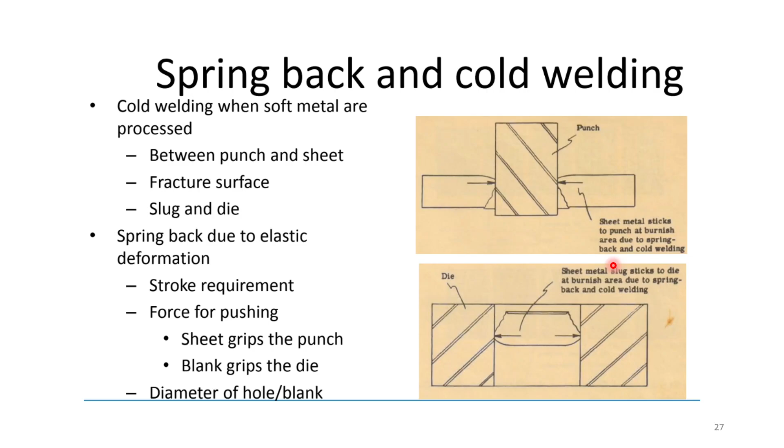So for getting rid of that, there are some methods used such as stripping. Here fixed strippers are used, so the stock is not directly put on the flat surface, rather you use a fixed stripper. So when this punch is traveling and coming back, it won't be sticking to the punch. This is separation of sheet and slug from the punch.

Now for the cutting force, for the optimum clearance you require this snapback of punch due to sudden release of the force as fracturing occurs. If there is no secondary shear, then it will be a vertical edge. In case of low clearance, where die and punch are very close, there will be a secondary type of shear, so extra stress will be required, possibly at a particular angle, but this secondary shear is not measurable.

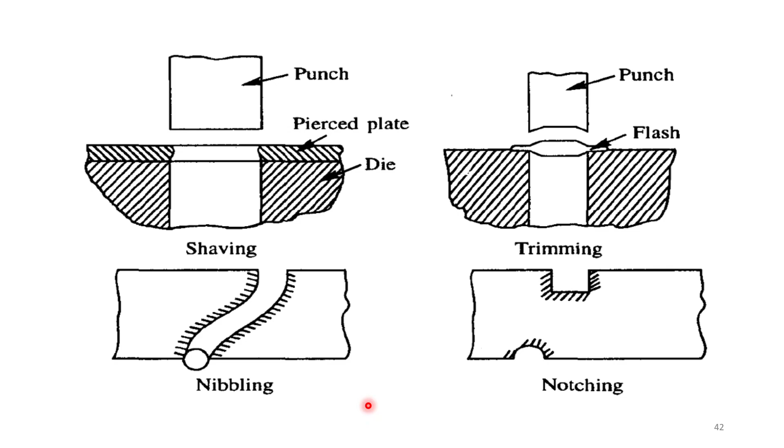Lecture 33: metal working processes for sheet metal operations. In this case, these operations will be involving tension.

Next, sheet metal operations involving compression. First is ironing, which involves thinning and lengthening of the wall of the material by generating compressive stress between the die and punch, using a clearance finer than the drawing operation. Up to 50% thinning can be obtained in a single ironing operation. The initial thickness of the part is reduced, and because of this reduction in thickness, the length will also increase.

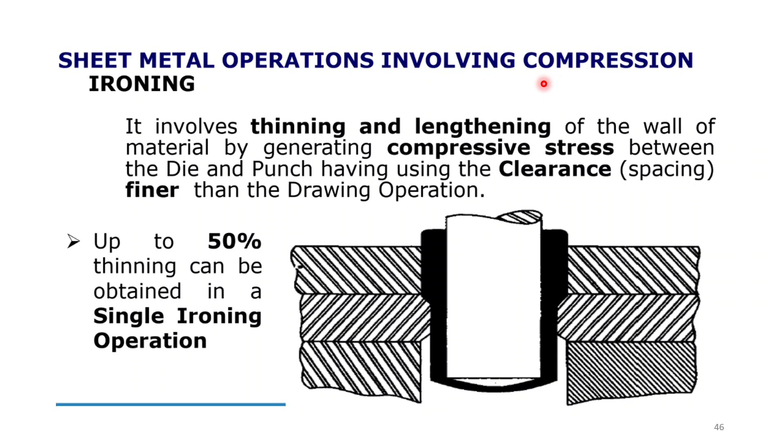Next are sheet metal operations which consist of both tension and compression, starting with drawing and deep drawing. Drawing is the process of making cups having height less than half the diameter, and similar products from metal blanks. When the cup height is more than half of the diameter, the process is known as deep drawing. Here you have the punch traveling, and here the blank, which will take the shape of the shell given.

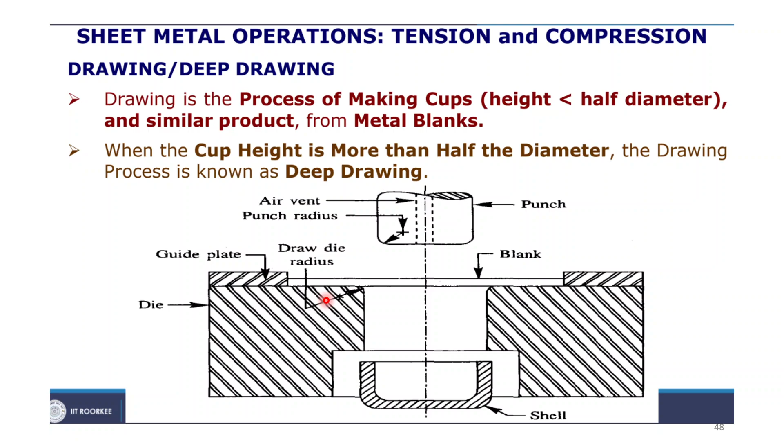So this is the process of blank holding in deep drawing. Here you have a rigid blank holder. After this, the punch will travel in this direction and take the shape of this particular die. Here you have blank holder, draw die, and the metal in this area will straighten upon further penetration, so this part will keep coming in this direction.

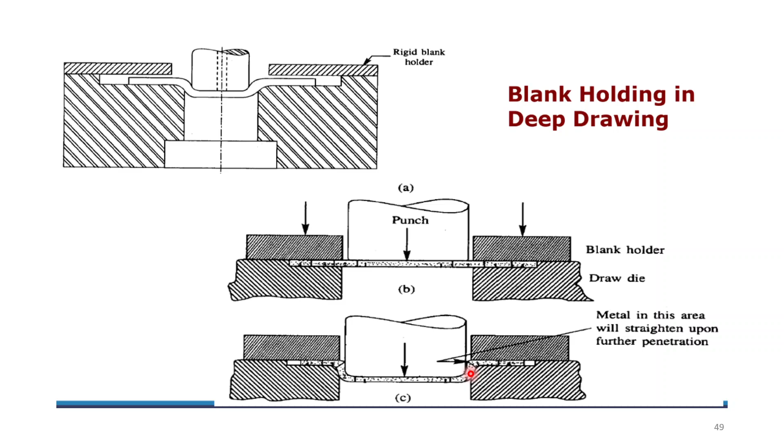Now these are various drawing defects. First is wrinkling in the flange, due to small holding force. When you have small holding force, you'll face this type of defect, wrinkling in the walls, due to insufficient holding force, initially occurring on the flange.

Tearing occurs due to high stress and sharp die radius, along the edges. Earing occurs at the edges, due to anisotropy of the material.

Surface scratches occur due to improper surface finish of the die and punch. The die or punch will not be having a smooth surface, and there is insufficient lubrication.

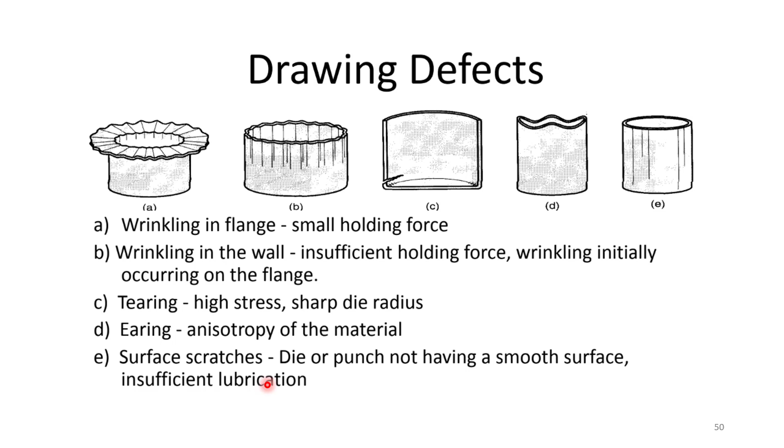Next you have spinning. It is used for making axisymmetrical cup-shaped articles. The force is applied on the rotating blank, and it is held against a form block so as to get the shape of the form block, which can be of wood or other materials as well.

Next we have bending operation, an operation of deforming a flat sheet around a straight axis at a neutral plane. When the material is subjected to plastic deformation, the neutral axis moves downward due to differential strain on both sides of the neutral axis, as the material opposes compression in a much better way than tension.

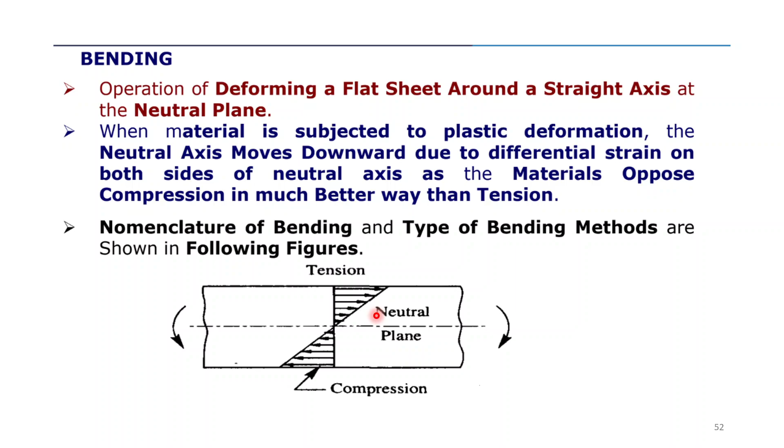Nomenclature of bending and types of bending methods are shown in the following figures. Here you have the neutral plane; above this you will face tension, and below this your material faces compression.

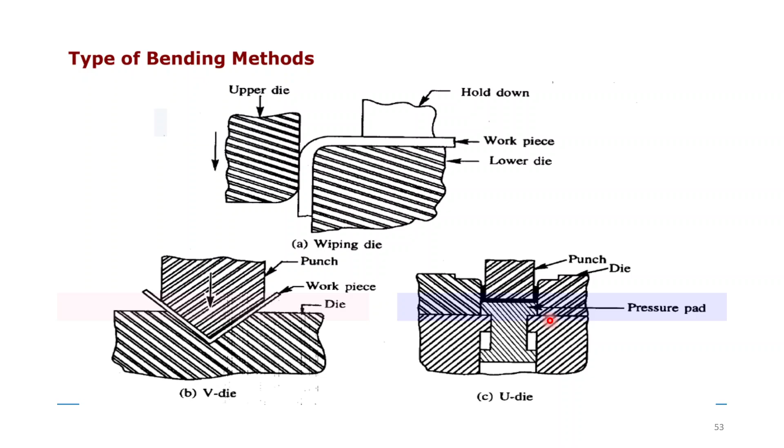Other bending operations are straight flanging, stretch flanging, shrink flanging, hemming, seaming and curling.

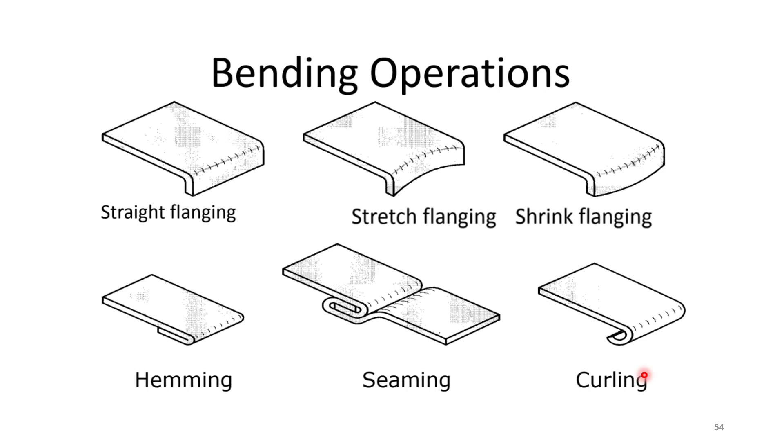Embossing is an operation of making raised figures and letters on sheets with a corresponding relief on the other side. The process involves drawing and bending of the material, and is generally used for increasing rigidity by localized deformation and for decorative sheet work. Between the punch and die, particular designs, figures or names can be engraved onto the metal sheet.

In lecture 34 we'll be talking about dies and die sets.

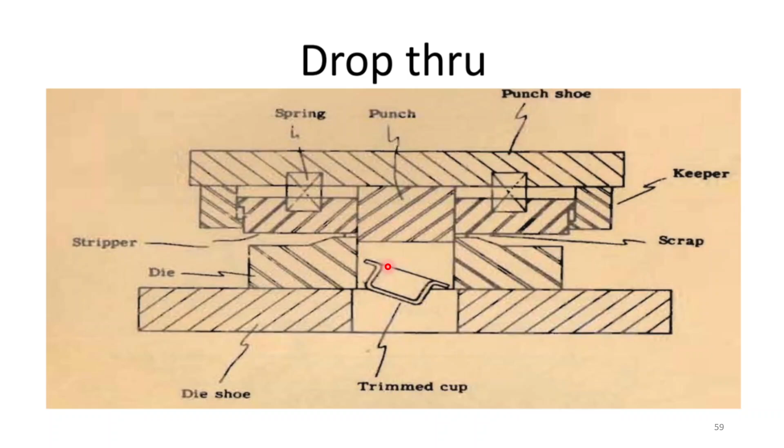Many processes are done using dies. First is cut off, where you have die and punch for cutting off the sheet, or drop through, where you have trimmed cups. Various types of dies can be there. Then you have return type die, where you have a spring on the die, which is used for the return of the blank that is formed.

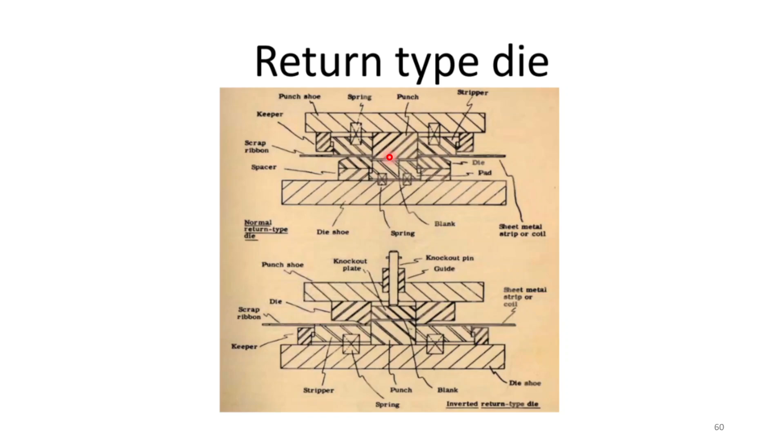Then you have compound type of die. What is the difference between compound and combination? In case of compound, you will be having similar types of operations combined in one stroke and one stage, while in case of combination you will be having different types of operations combined, such as cutting and forming.

In case of compound die, it is employed when multiple cutting operations are conducted in a single stroke at one stage, and this die type offers certain advantages and limitations. The advantage is high production rate, since one component is produced per stroke. The limitation is higher force requirement compared to other die types, and complex design and manufacturing for more than 3 operations.

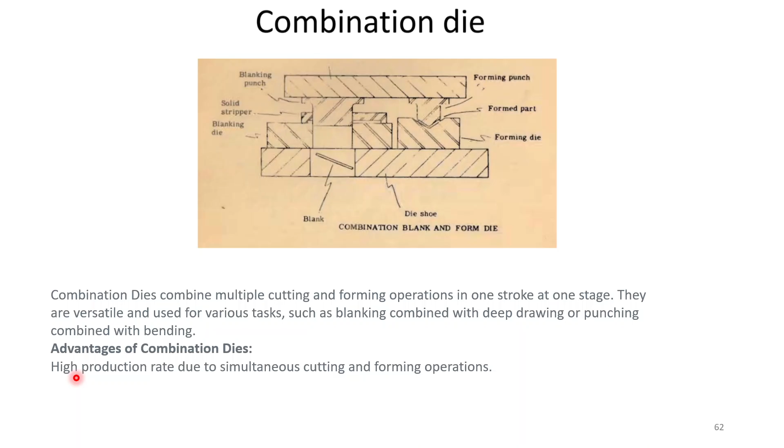In case of combination die, it combines multiple cutting and forming operations in one stroke at one stage. These are versatile and used for various tasks such as blanking combined with deep drawing, or punching combined with bending. The advantage is high production rate due to simultaneous cutting and forming operations.

In case of progressive die, we have progressive dies which are designed for multiple cutting operations in a single stroke but at different stages. The punched out sheet progresses from one stage to another until all the punching operations are completed, with blanking as the final step.

The advantage of progressive dies is comparable high production rate as in compound dies, and reduced force requirements which are achieved through shear or staggered punches. It has easier design and manufacturing due to operations being performed at different stages.

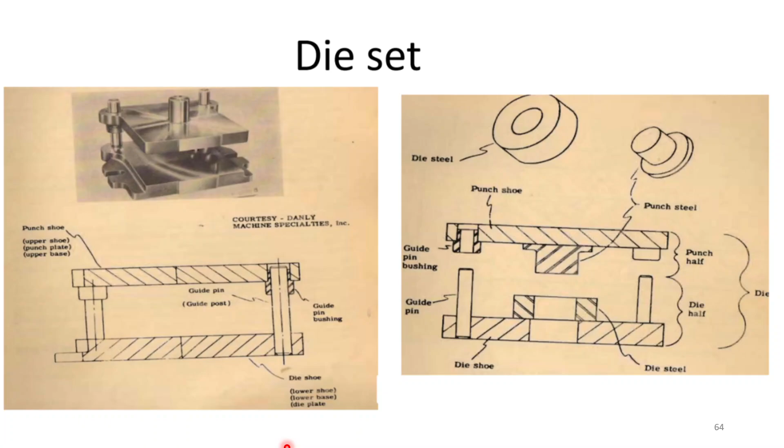And these are designs of other different dies.

Next chapter is material removal processes. Up to this part we have read about sheet metal forming. Now we go to the material removal processes, which is basically machining. So what is machining, by definition? Machining is a subtractive process used to get desired shape, size and finish by removing surplus material in the form of chips by a cutting tool, by providing suitable relative motion between the workpiece and cutting tool.

You can remember this definition by remembering lathe machine operation, where you have a particular tool which will be moving relative to the workpiece. The cutting tool removes excess material through direct mechanical contact, and the machine tool provides the necessary relative motion between workpiece and tool.

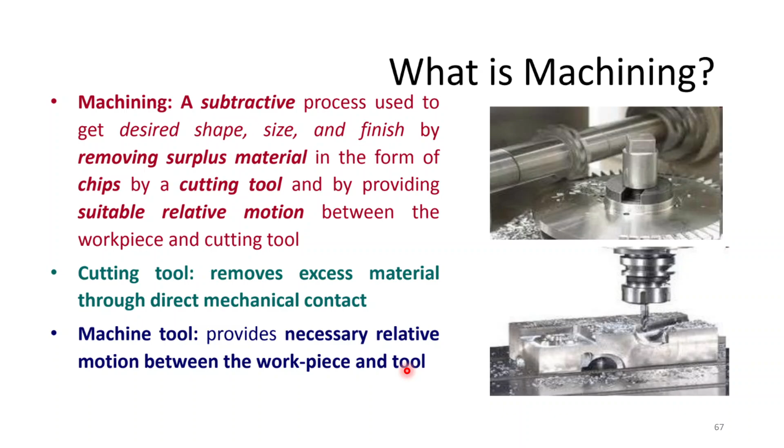So this is how your cutting tool is moving, and how the entire machine relative to the workpiece is moving. These can be at particular angles, they don't need to be parallel. This is the relative motion needed for various types of surface generation.

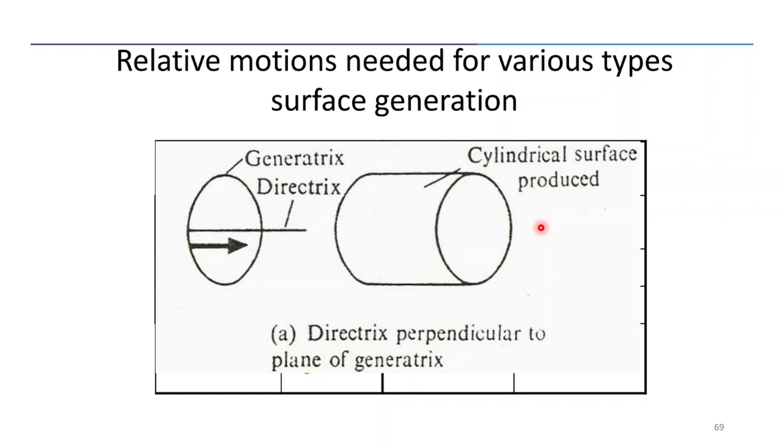So the directrix can be perpendicular to the plane of the generatrix, or it can be at an angle as well. So these are the types of machining processes based on the angle between the cutting edge and cutting velocity.

By cutting velocity, I mean the rotation or movement of the tool. If you're reducing the diameter of a rod in the lathe, the cutting velocity is not the inward movement to the diameter of the tool, but rather the rotation, calculated as pi*d*n by 60. The cutting edge is how the tool is moving, in a rotational part, in a particular direction, while the cutting velocity is the velocity moving perpendicular to the material.

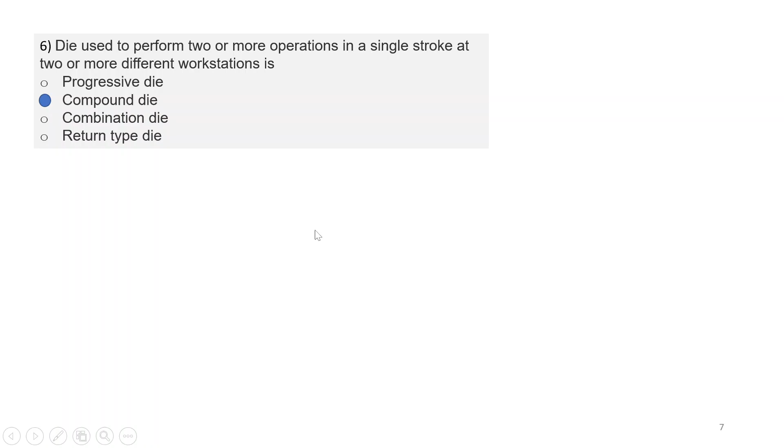The percentage can also be asked. For hard metals it will be 6 to 10%, and for soft materials it will be 10 to 18%. And which metals fall into soft metals, you can also remember - one of the slides had all soft metals listed. So lead, tin, aluminum fall into soft metals, and steel, silicon steel, titanium and others fall into hard metals.

So your clearance depends on the softness of metal and thickness of the metal. With increase in thickness there will be increase in deformation zone. Also, harder the metal, lower is the burnishing and deformation size, so there will be less depth of penetration in case of harder metals. The burr height will also depend on the softness of metal. If there is insufficient clearance, it can cause metal to compress or bulge out away from the punch, causing increased friction, and greater force will be needed to create the hole. With reduced clearance, it can increase tool chipping risk at some point.

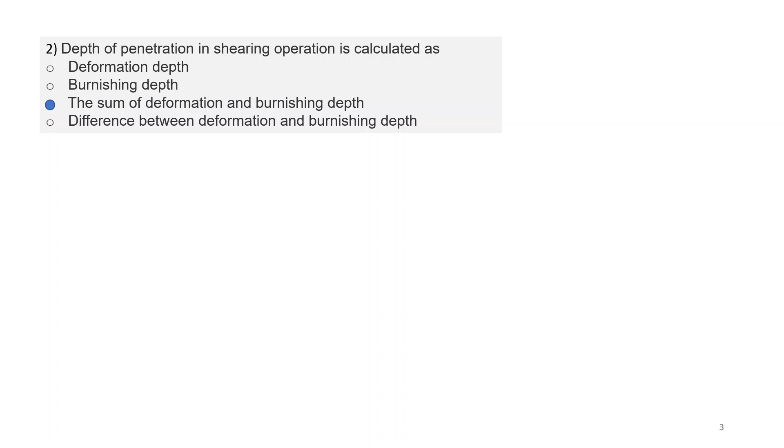Next question is: depth of penetration in a shearing operation is calculated as - your options are deformation depth, burnishing depth, sum of deformation and burnishing depth, or difference between deformation and burnishing depth. The answer is sum of deformation and burnishing depth. You can remember this diagram: initially your material is subjected to plastic deformation, then there's a burnishing zone, then a fracture zone, then burr height.

So the initial part - burnish and plastic deformation combined - is called penetration depth. In shearing, the depth of penetration is the depth of stroke when the cutting force is applied to the metal before it breaks or fractures, usually expressed as a percentage of the thickness of the work metal. The depth of penetration is roughly the sum of the burnish depth and rollover depth on the blank. Shearing is also known as die cutting - it is a cold mechanical cutting process which uses two sharp blades to cut sheet metal, where the lower blade is stationary while the upper blade slices through the metal.

Next is burnish zone - this is the area where the cutting tool penetrates the sheet metal before it fractures, and the sheet metal compresses into the cutting tool, giving it a smooth, flat and shiny appearance. Next is tool wear - as the tool wears, the burr height and burnish depth increase, and a duller tool can allow material to flow instead of promoting shearing, deformation and fracture.

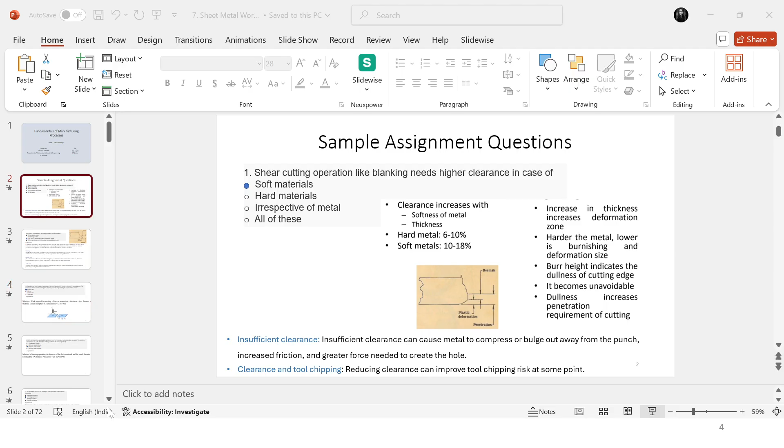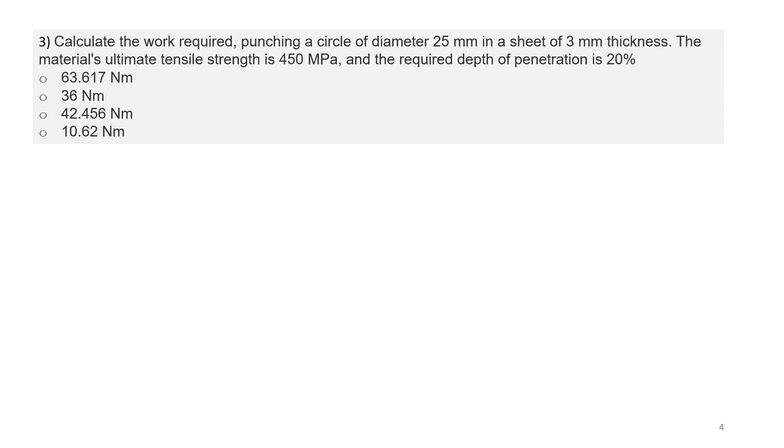Next question: calculate the work required for punching a circle of diameter 25mm in a sheet of 3mm thickness, where the material's ultimate tensile strength is 450 MPa and required depth of penetration is 20%. Your options are 63, 36, 42 and 10 Newton meter. The answer is 63. For work required, you have to remember this formula: force multiplied by penetration depth.

Penetration depth will be penetration percentage multiplied by thickness, and the force will be shear strength times the penetration area. This area is where it's coming in contact with the punch, the sheet area, so it will be pi times d times t. Diameter is given, thickness is given, shear strength you can consider as ultimate tensile strength here, and the answer will be 63.617 Newton meter.

Next question is: a 20 mm diameter blank will be produced from a 5 mm sheet in a blanking operation, and the preferred clearance is 5%. The diameter of the punch and die are respectively. Your options are 20 mm and 20 mm both, or 19.5 mm and 20.5 mm, 19.5 mm and 20 mm, and 19.5 mm and 19.5 mm.

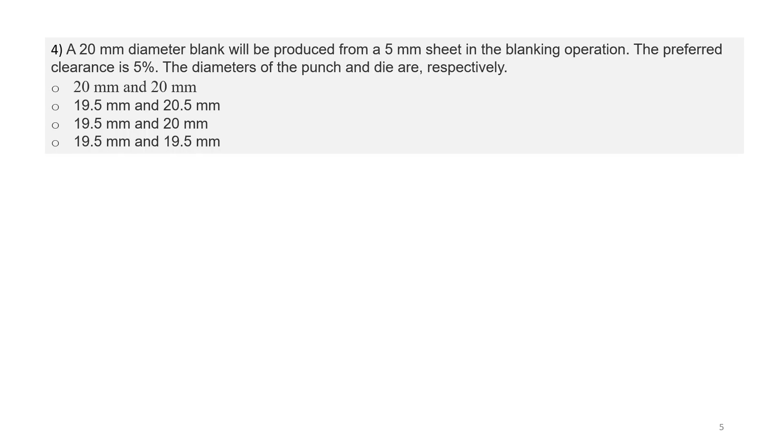In case of blanking operation, the size of the blank will be similar to the size of the die. So die size will be 20 mm, and in blanking operation the diameter of the die is unaltered, while the punch diameter is reduced by 2 times the clearance multiplied by thickness. So you minus this entire thing: 20 minus 2 multiplied by 0.05 times 5. So it will be 19.5 mm as the punch size, and die size will remain 20 mm.

Next question is, the operation used for making axis symmetric conical shape products is. Your options are blanking operation, spinning operation, ironing operation and coining operation. So the answer will be spinning operation.

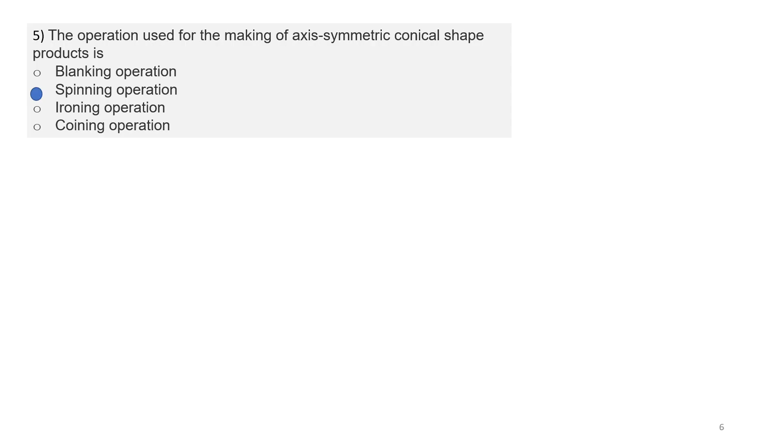Metal spinning refers to the group of forming processes which allow production of hollow, axially symmetric sheet metal components. The basic technique of spinning, common to this group of processes, consists of clamping a sheet metal blank against a mandrel on a spinning lathe and gradually forming the blank onto the mandrel surface by a roller, either in a single step or series of steps. So here you will have the sheet and mandrel, and this sheet will be rolled with the roller and it will be given the shape of the mandrel.

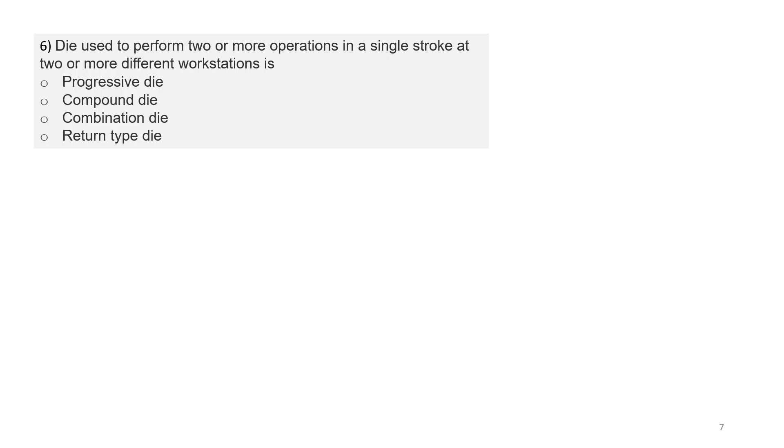Sixth question is, the die used to perform 2 or more operations in a single stroke at 2 or more different workstations is. The options are progressive die, compound die, combination die, and return type die. So the answer will be compound die.

So the answer will be combination die here, for different types of operations. A die is a machine tool commonly employed in manufacturing to shape metal by cutting it into a desired form or creating external threads on items such as pipes or round rods. In case of combination dies, it combines multiple cutting and forming operations in one stroke at one stage, and these are versatile and used for various tasks such as blanking combined with deep drawing or punching combined with bending. Advantages are high production rate due to the simultaneous cutting and forming operations.

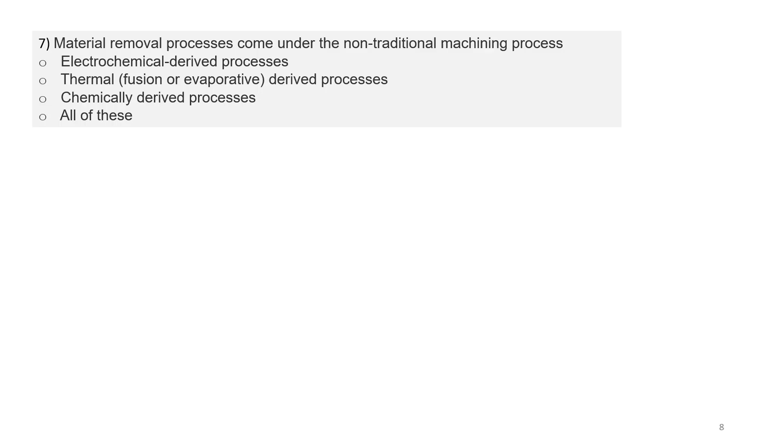Seventh question is, which material removal processes come under non-traditional machining processes. Options are electrochemical derived processes, thermal derived processes such as fusion and evaporation, chemically derived processes, or all of these. So the answer will be all of these.

Non-traditional machining processes use a variety of energies including mechanical, thermal, electrical and chemical to remove material, and they don't use the sharp cutting tools used in traditional manufacturing processes. So many material removal processes are considered non-traditional machining processes, which are unconventional methods to remove material.

First is electrical discharge machining, EDM, which uses electrical sparks to remove material from the workpiece. Electrochemical machining uses an electrolyte and electrical current to remove material through ion transfer, and this process is ideal for hard materials like stainless steel and tungsten. Chemical machining uses a strong chemical reagent to dissolve the workpiece material. Plasma cutting uses a high velocity gas stream to expel molten material from the cut, and this process is often used for cutting steel, stainless steel, aluminum, brass and copper.

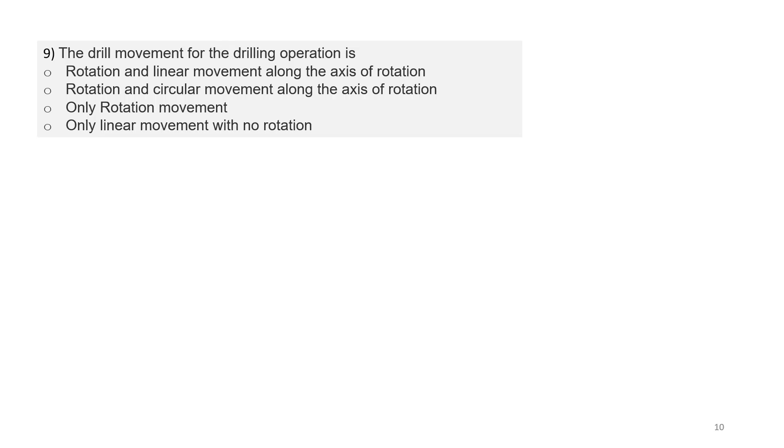Ninth question is, the drill movement for the drilling operation is. Your options are rotation and linear movement along the axis of rotation, rotation and circular movement along the axis of rotation, only rotation movement, or only linear movement with no rotation. Answer will be rotation and linear movement along the axis of rotation.

This can be explained as: the rotation motion provides cutting of material, and linear up and down movement provides progression into the material during drilling-based operations. The working principle of any drilling machine remains almost similar - when power is supplied to the motor, the spindle rotates, causing the attached step pulley to also rotate.

Ma'am, if we explain the generatrix and directrix here, the generatrix will be circular motion and the directrix will be a straight line. One second.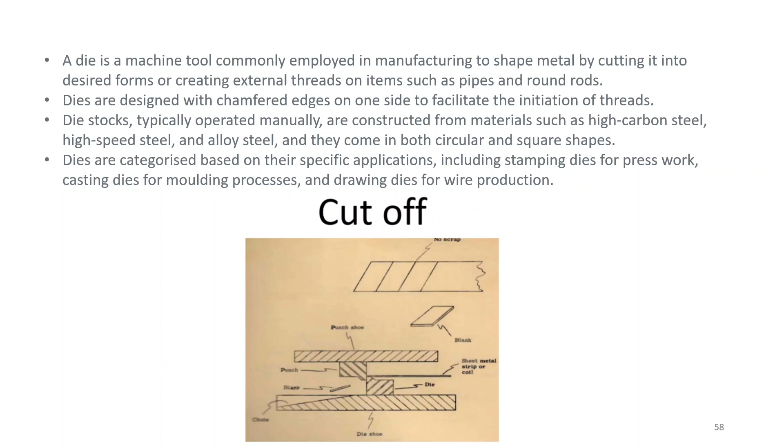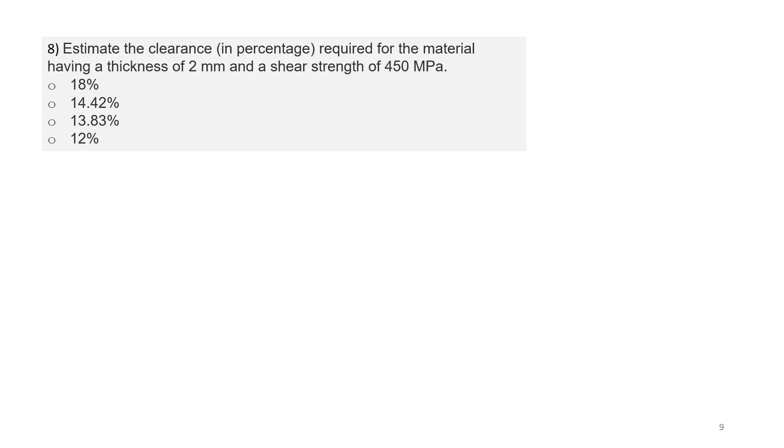So we had feed speed and cutting speed. Cutting speed is the line generated by it, called generatrix. Primary cutting motion and secondary cutting motion is feed speed. Feed is provided where the workpiece moves corresponding to the cutting tool, and that will be perpendicular while the cutting motion will be rotation. So cutting speed will be rotation, that is generatrix, and directrix will be perpendicular to where your cutting tool is moving. So directrix is the perpendicular motion and generatrix is this circular motion.

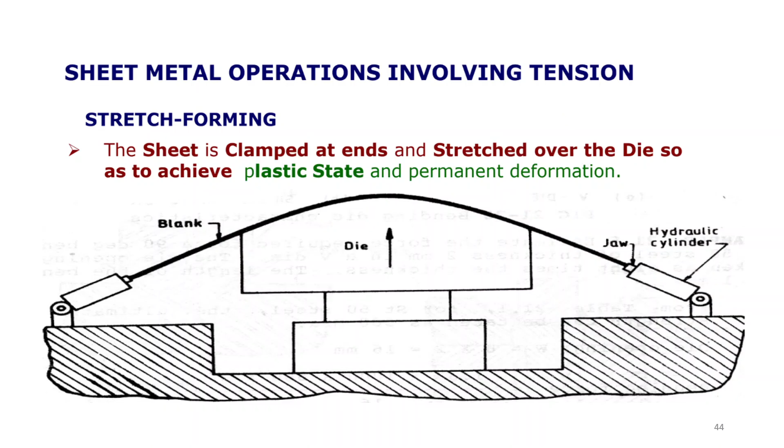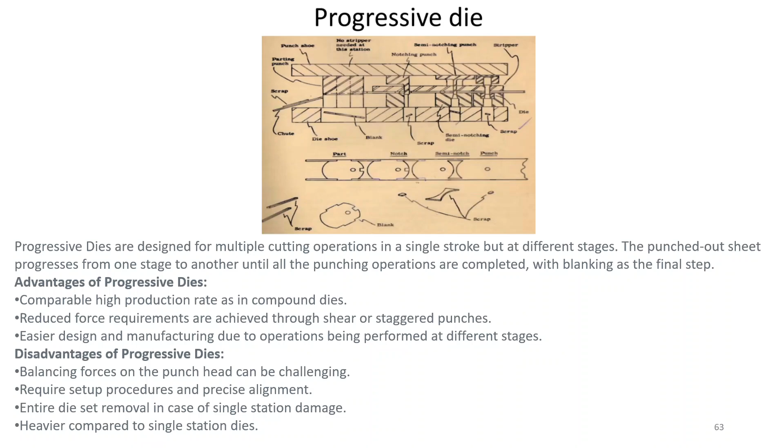Then we went through lecture notes based on shearing operations, where we defined what shearing is and metal cutting operations. Next chapter was again shearing operations, then sheet metal operations including blanking and trimming operations. Then sheet metal operations based on different types of stresses such as tension and tension-compression. After that we went into details of dies and die sets, types of dies, and finally material removal processes - machining, its definition and types based on cutting tool.

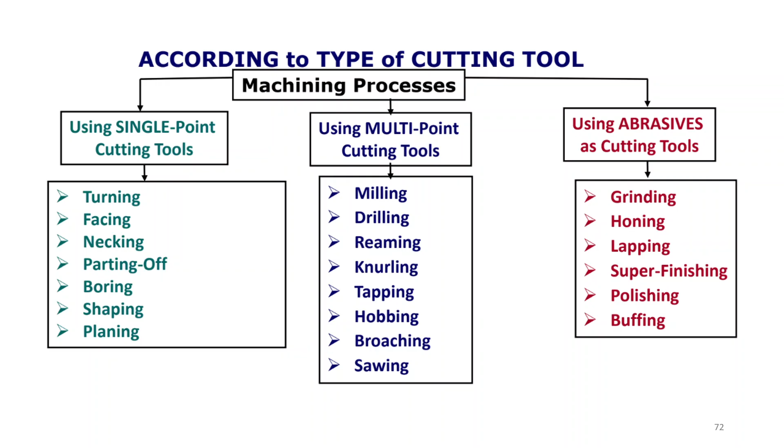Okay, that's it from my side. Do you have any questions, Ma'am?

Yeah, in the last class I asked about the timing for nitriding, carburizing, and cyaniding - approximate time for these processes. In one of the CP Sharma books on heat treatment, I found the exact time required for a particular depth in nitriding. One second, let me find that book.

Also ma'am, there's a JRF given by the CSIR labs - is this JRF equivalent to an MTech? JRF is equal to, I think, the initial years of a PhD.

So what is the stipend provided in JRF? They give approximately 31 to 37 thousand range. So in the initial years of PhD, you are given around 35 to 37,000 rupees as stipend.